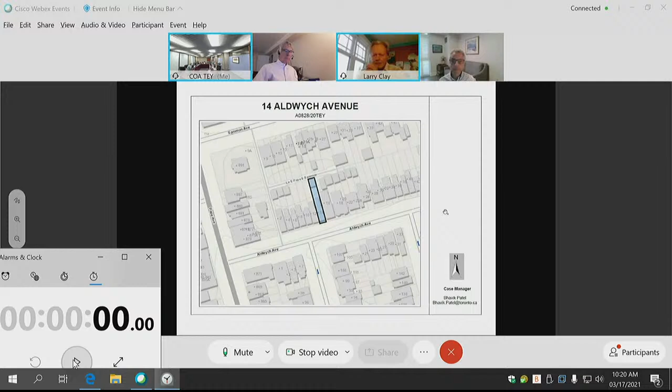Good morning, Chair and Committee. Yes, that's correct, the applicant is requesting a deferral. There was a glitch in the computer system in the zoning department, and it removed a condition which would require a variance. It was too late to circulate that information and the additional component to the zoning notice with neighbors, etc. So it's kind of a critical one - it's to do with lot coverage. Correct, yeah, yeah.

Hello, my name is Ramla Nadeem. I'm speaking on behalf of Rana Siddiqui and Asifa Nadeem, and I'm in favor of a deferral. Yes, please, I'm in favor of a deferral. I'll move a motion to defer this application.

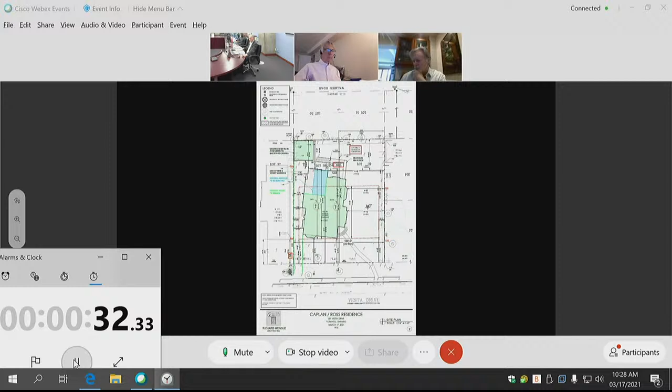And what I'd like you to do, please, is to turn to page 2. Thank you. So this is a proposal for an addition to an existing home. The home has heritage status, as it was recently designated. This was originally before the committee to redevelop this property into 2 dwellings, but then it was decided by Heritage that this house had heritage preservation status, so it's now been designated. Our proposal is very simple: there's an original addition labeled in blue at the back corner of the property, and our intent is to remove that addition and replace it with a new addition that squares off, combining the blue with the diagonal shading to the left of it. You can see we're squaring off basically the addition. We're also proposing a rear deck that's elevated because the ground actually drops off towards the back - it's a walkout lot. We have been in discussions with neighbors at number 8 Gardiner who had some concerns about the depth of the deck.

Originally it was at 20 feet, and we've agreed with him to reduce the projection from the main rear wall to 14 feet. In addition to that, there will be some privacy screening along the rear property line, as well as some drainage issues that emanate from some other lots that we're going to try to resolve with our builder.

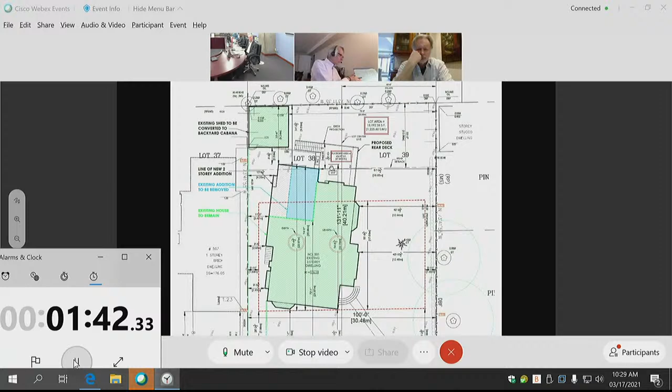If I can just take you to page number 3. Again, we are asking for an FSI of 0.72. This is an illustration of all the committee applications that have been heard in the area in the same zoning designation of 0.65 that have been approved at or above what we are suggesting or requesting. And I think we fall well within the range.

Page number 4, please. If we just look to the top two images, those are the existing home. In the middle of the page, there's actually a drive under where we do have two garage spaces. And on the right side in the middle where that circle is, that's the original addition. If we just scroll down a bit more, you can see there's also an old structure that we're going to repurpose as a cabana.

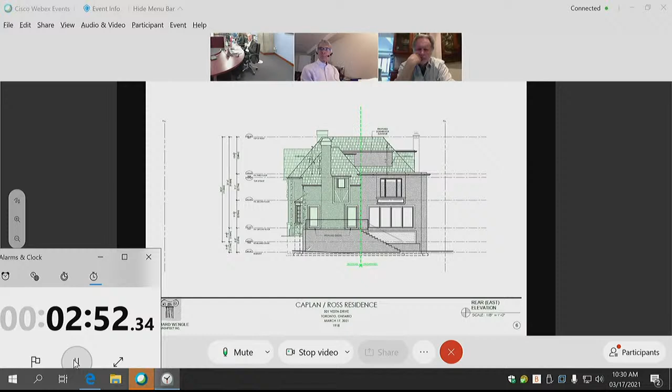So essentially we're replacing that addition that was added on, we think probably in the 70s, and just putting a new, more fulfilling addition. If we just go to the next page, the green is the existing home, and the gray shading in black and white is the proposed addition on the back corner of the house. The next page shows the other view from the rear, and the side view shows the addition and the deck.

I think it does pass the four tests. I do believe it's minor in nature, and I can answer any questions that you have. Thank you.

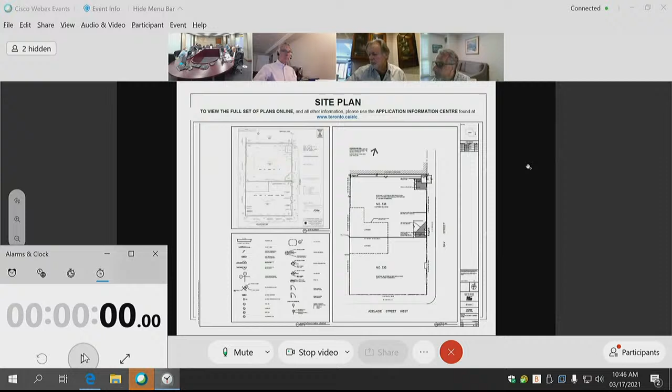I just had a question. I know that City Planning indicated there was a resolution with the applicant on a revised set of numbers, if the applicant can clarify that.

Are you able to hear me now? Okay, so the City Planning report indicated there were revisions to the numbers and that the applicant was agreeable to that. If they can just clarify that.

Absolutely. Since the application was submitted, the plans were revised to respond to City Planning's comments. In particular, the application no longer seeks to infill the entrances located at the northeast and southeast corners of the building. As a result, the amount of additional GFA being sought was reduced, and the variances that reflect that reduction in GFA are reflected in City Planning's notice.

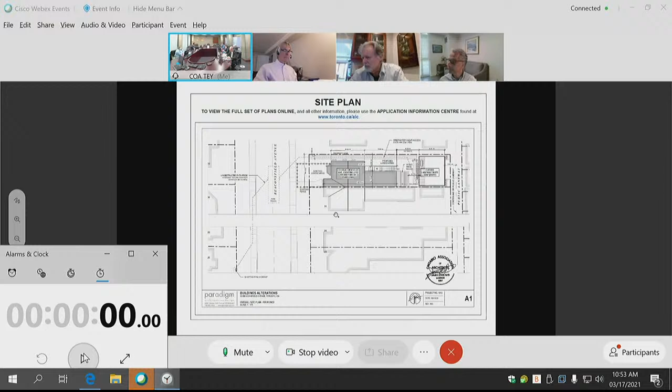Yes, good morning, Chair and members of committee. My name is Jim Sod, or James, representing the owner. I'm the agent from Paradigm Architecture and Design.

Okay, thank you. Essentially, there's just the two variances. I'm actually going to start with the parking variance. I think that's more than straightforward, given that there is boulevard parking available. It is an urban downtown site, and there is public transit readily available.

The application at hand is to request a very small increase in the floor area of a secondary suite. This is a second secondary suite, if you will, for a total of 3 suites or 3 dwelling units within the main building. Yes, there is an application that was previously applied for a laneway suite as well.

I shouldn't say as of right, I should say in keeping with the 4 tests. I think that this very minor in nature application meets all of the 4 tests as well. And it's our hopes that with the 5 letters of support that we have from neighbors at 32 Beaconsfield, 42 Beaconsfield, 40 Beaconsfield, 34 and 38 Beaconsfield, that committee would find this also a very minor application worthy of granting.

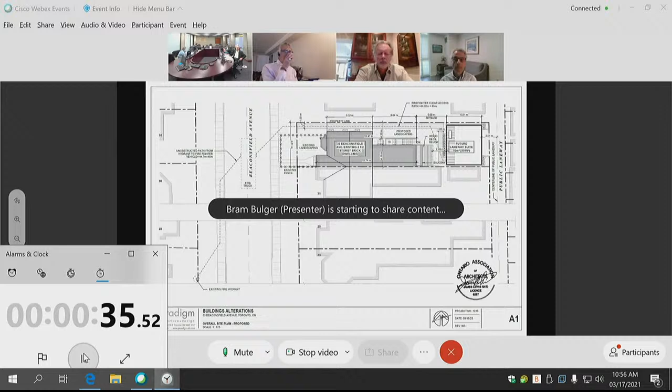I'm concerned about the commercialization of the housing in our neighborhood. This application particularly caught my attention because the work has been ongoing at that site for several years now. It's duly noted that there was a laneway suite application and proposal that was approved. You mentioned that already. That application, particularly associated with the construction at this site, granted several exemptions, far exceeding the bylaw standards for laneway suites, but that is what it is.

It's done now. This conversion of residential housing in our neighborhood is putting pressures not only on the neighborhood itself, because some of this housing is sort of set up for more transient residents and tenants. In other words, not long-term residents. That's what our feeling is here, or my feeling particularly.

This particular property has already established the fact that they've built, and I sent a copy of the rental posting last year for this requested secondary suite. It's already been on the market. Certainly the laneway suite, when it's built, will be on the market at somewhere near that type of rental unit pricing, and I don't think it's helping out the affordability of the neighborhood for established residents and tenants.

The rents keep going up in this area. Tenants keep moving out. We've got empty houses that are under construction or renovations for periods of a year plus within a stone's throw of that particular property. So this is an ongoing problem, but I want to speak particularly to the parking issue.

2 cars parked, it looks like the proposal is to park them in the laneway suite once it's built. So in the meantime, while that's being built, could be 6 months to a year at the typical rates that we've seen in the neighborhood. That's going to put pressure more on on-street parking.

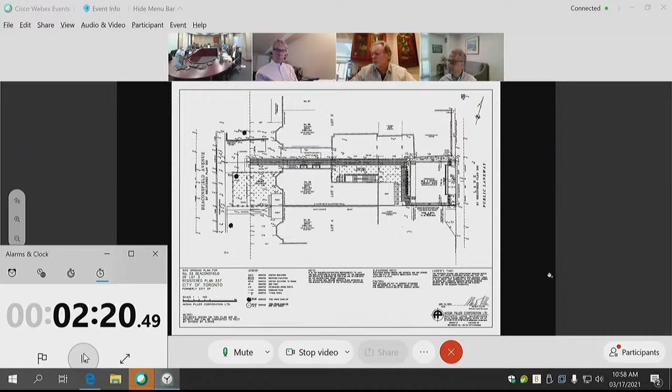On-street parking on Beaconsfield, Dovercourt, Northcote, Lisgar, the entire area is under extreme pressure because of the bars and the restaurants on Queen Street, even on Dundas coming south. There is no parking on the street, so this is just going to add to the problem.

And then once that laneway suite is built, those parking spots underneath, are they safe? Are tenants going to feel safe in having cars come and go every day, several times a day, when you're living above it? They just had that incident on Bloor Street where the carbon monoxide issue came to the forefront of being parked under a space that's operating motor vehicles, even if they're just being warmed up for a few minutes.

Anyway, I can't understand why the 3 spots can't be maintained, 3 parking spots, even if they don't use the 2 parking spots in the laneway suite. At least they use one in the front, maybe a boulevard parking requirement. But they've done away with the driveway portion of that.

If you can see from that PDF I sent you, it shows you the lot a little more clearly, because they haven't cemented it in, or haven't put in anything. It's gravel. It looks like it could be subject to proper landscaping.

Not landscape, but landscaping, waterproof, permeable driveway space with a boulevard parking space, takes some pressure off the parking on the street, which I said is extremely under pressure. It has been for years, and this just makes it worse.

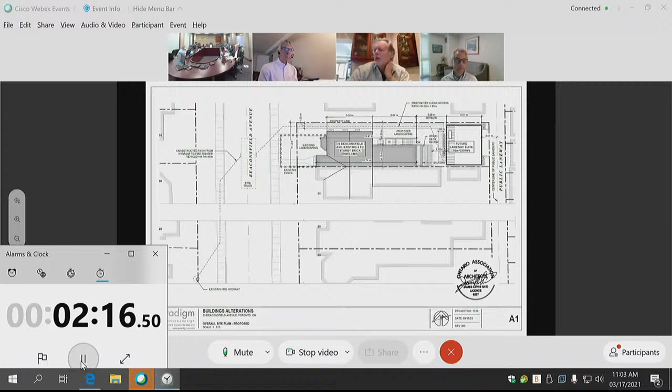I do sympathize with the neighbors and the fact that there is this intensification happening, but again, if you live in the downtown core, it is part of city life. There is no intention to have very transient residents come and go. The hope is always, and the owner is a very responsible landlord who vets his tenants quite carefully, that he finds tenants that are long-term as much as possible. So I don't see anything about the application that works against the neighborhood. I think if anything, it is completely aligned with what would be expected by the neighborhood and the residents.

I wonder, could either the applicant or the person in opposition clarify where the third parking space that was referred to currently exists? I gather there are two parking spaces under the laneway suite, and then I assumed from the presentation that somewhere on the lot there's a third parking space. Is it in the area that is on the site plan designated for proposed landscaping?

Yes, I'm sorry. Can we put that site plan up just for a moment? I'm having trouble accessing mine. Thank you.

There was obviously a right-of-way shared with the neighboring property to the north that took you to the rear. The spot was generally perceived to be at the front of the building. I don't think there was ever any kind of provisions made with the landscaping in place to have a third parking spot at the rear there. It was at the front of the house originally, so it was front yard parking.

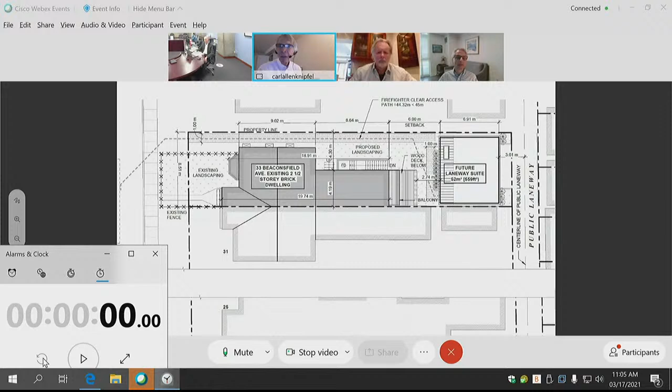I'm sorry to interrupt. I should clarify that it still exists. I'm just getting some notifications from the owner. He says that the space at the front of the house is still in existence. Okay, but it's not a legally recognized parking space. It's in the area that you've got listed as existing landscaping in the front yard. Is that correct? That is correct. Okay, thank you. You're welcome.

Chair, maybe I'll just start. First of all, I want to acknowledge the speaker's concerns that were raised. They're important, and I note there's another letter of concern in the file, mostly about construction noise and disruption to the community. These are legitimate concerns. But having said that, I take the applicant's point about location. This is virtually a downtown area, an area in high demand. The housing stock is large. It is usually suited to being made into rental accommodation. We are in a situation where the city is in dire need of rental, and I think on the whole, this is a worthwhile application. I'm not concerned about the parking, although I acknowledge it is an issue in this neighborhood and many others. But the variances being proposed, quite frankly, are relatively minor. In that context, I'm prepared to support this application.

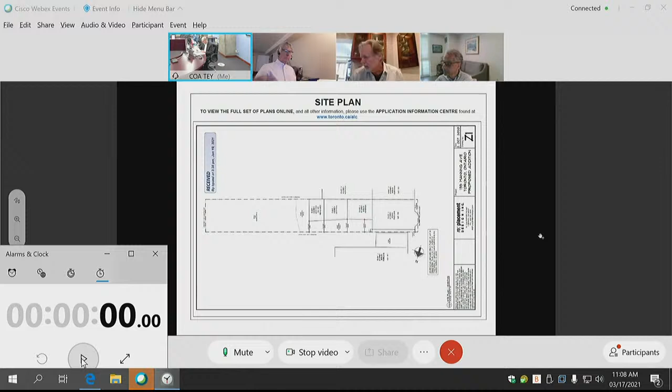Hi, yes, my name is Mike De Oliveira. I'm here representing 155 Manning Avenue, and I'm with Replacement Design, located at 911 Davenport Road.

No, just a quick question. It is a semi, is the adjoining semi 153? That's correct, yes. So the adjoining semi is supportive? Yes, they are in support, and 159 is a rental, that's why we don't necessarily have a letter from them, but 153 that's connected is in support of our application. Could you clarify, is 157 in support? Because your addition goes back quite a bit further than theirs, and I didn't see support from them, have I missed it? There actually isn't a 157 - oddly enough, it goes from 155 to 159. That's why I mentioned 159 is actually a rental property, the owners don't actually live there, so we don't have any letters from them, but they had no comments for or against. Okay, thank you very much. So that's what we've got, 157 on the drawings we have. Okay, thank you. Yep.

Sure, can I ask Bram to show a presentation? So we are proposing to build a third floor rear addition, enclosing an existing balcony on the second floor, and remodel the interior of an existing 2.5 story house. The proposed addition will create some additional space for the growing family. So we trigger some variances. I'll focus my presentation on the main ones: the setbacks, the floor space index, and lastly, the building and main wall height.

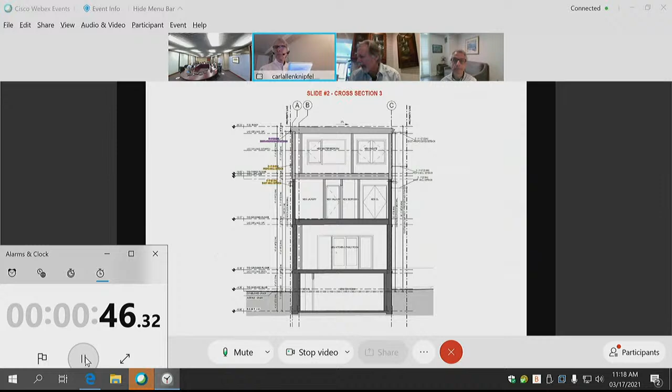So if we go to slide number 2, exactly, if you could zoom to the highlighted parts. So as you can see, the zoning bylaw allows building an addition with the same side yard setback as the existing house, so we are potentially compliant at 0.12. The proposed side yard setback is at 0.08, and it's a technical variance caused by a requirement from the Ontario Building Code for continuous insulation. That's why we trigger only 4 centimeters from what we're allowed. Associated with that, as you can see on top, we also trigger a roof eaves setback variance, item number 8. The roof only overhangs the new wall proposed by 4 centimeters as well.

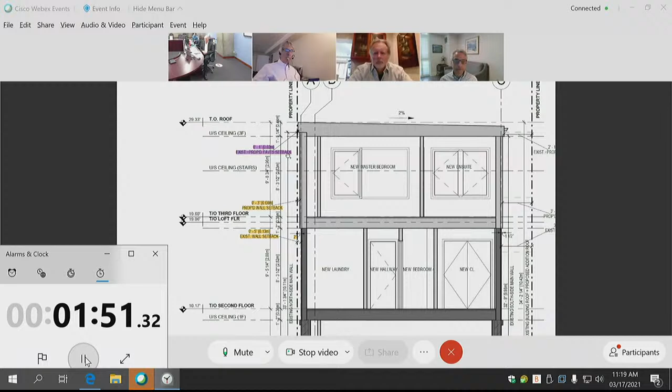So it's impossible to meet the requirement of the 30 centimeter minimum distance to the lot line. And if you also go to slide number 3, you'll see that the proposed eaves match the existing eaves.

So now if we go to the FSI, item number 3 and slide 7, please. I want to highlight first that there's a distinction at the two rows at the bottom. It's highly misleading because we have to include the existing basement in the calculation of the FSI.

Because the actual definition of a basement has changed in 2018 and requires us to do so. To clarify, the basement is well below grade and the ground floor is typical of other neighbors' houses. If we were to only count the above grade floor area, as it should have been the case, the proposed FSI is only 1.08.

For that reason, it already impacts the reasoning of the massing. Second, related to the same thing with the FSI, as you can see, the footprint of the addition between the existing and the proposed on the third floor area is quite small, 768 square feet, so that equates to 26% of the FSI. The existing house is also already over at 0.78.

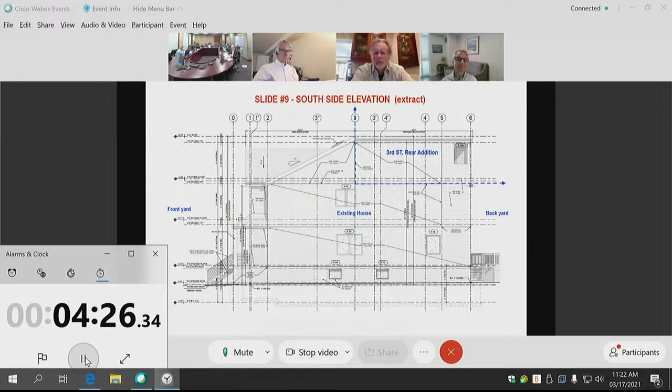We do not hear what you're saying. Can't hear you, Chair.

I wonder, Chair, excuse me, if I could just ask the applicant a quick question before we get started. I know we've got a lot of people scheduled to speak and we're interested in hearing those concerns. Given that, I just wanted to ask the applicant whether, obviously the application was circulated, but did you have any discussions or conversations with any of the neighbors in the surrounding area at all?

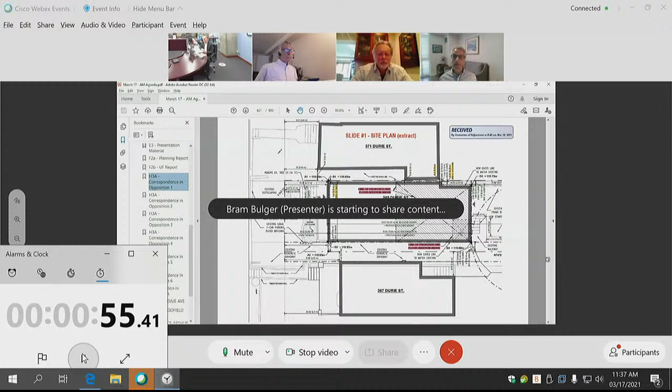It is, of course, let's not pretend that 25-foot lots are islands of privacy. And if that is what you're seeking from a home, then Durie Street is probably not the street for you. But what is incredibly valuable in this street is the sense of community that living close to your neighbors has. But with that comes this idea that we try and build those little nooks of privacy that we care about, and that we respect them in our neighbors. And that's kind of the unspoken deal of this street.

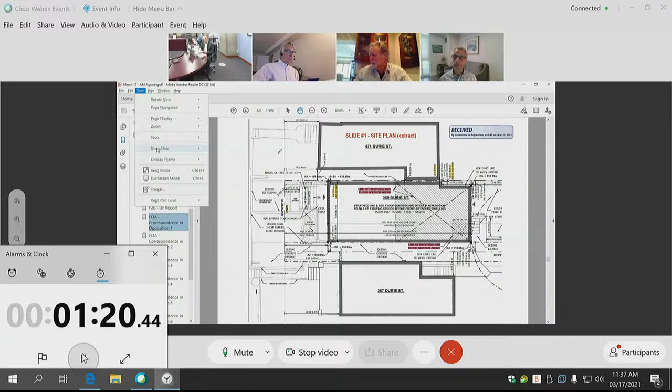We're lucky to have yards in backyards where we can enjoy the sunshine, where we can have, even in the city, a little spot of private enjoyment, where we can eat a meal and nobody's peering over us, and have the sunshine on us, or maybe just lie on the deck. Why not? Why shouldn't we have that from the house that we own?

Neighborhoods, according to our official plan, are physically stable areas. And our official plan says the stability of our neighborhood's physical characteristics is one of the keys to Toronto's success. This is a successful neighborhood. And the official plan points out that while communities experience constant social and demographic change, which is very true of Durie Street, the general physical characteristic of Toronto's residential neighborhoods endure.

My wife and I raised our 3 daughters here, and the proposed development of 369 Durie doesn't affect our yard, it doesn't affect our sunshine or our privacy. But from living here, I know how valuable these things are. So when I became aware of the proposal for 369, I wasn't concerned for us. But of course, I did think about what if. What if neighbors moved beside us and proposed the same? A 30-foot wall that blocked our little patch of sunshine with a balcony that peered over my summer dining room table.

And if I didn't want that for me, then how could I want that for someone else? So here I am. The official plan says physical changes to our neighborhoods must be sensitive, gradual, and fit an existing physical character. A key objective of the plan is that new development respect and reinforce the general physical patterns of the neighborhood. And that's where I think that this proposal just goes too far. The proposal is simply too massive for the lot.

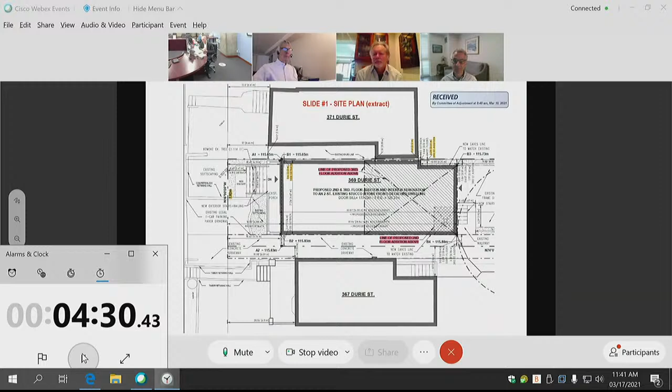I don't think that was what was intended as a minor variation. We have already seen the city planning department condemn this proposal as simply too massive at nearly twice the permitted size. It's not a minor variance. It's not consistent with a sensitive and gradual change to neighborhoods envisioned by the official plan, and that it's your job to respect. So with the city and with our neighbors, I think this committee must conclude that this variance just cannot be granted. Thank you.

Yes, thank you. This is Justin Hollins at 394 Durie Street. I've been living in this neighborhood since 1999, and I love this neighborhood. It's a great place to live.

The houses are very similar to each other, and as previously mentioned, they're very close to each other as well. So when one house expands, other houses commonly suffer. In this particular case, the size of the additions, the variances, do not correspond to the character of the neighborhood. As we heard from the neighbors at 371, this new construction will block the light in their backyard and others. And of course, there are, I think, privacy concerns when you build so high up. And for these reasons, I believe the proposal should be declined. Thank you.

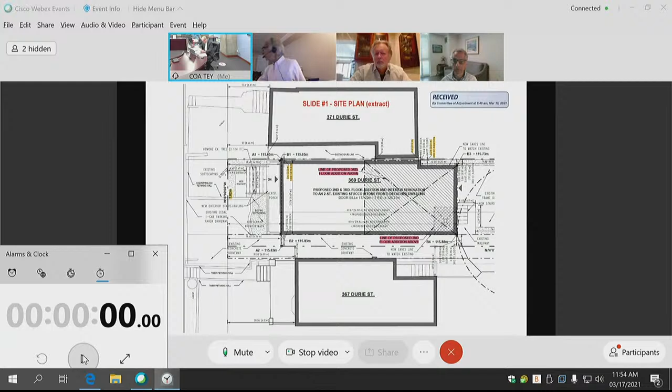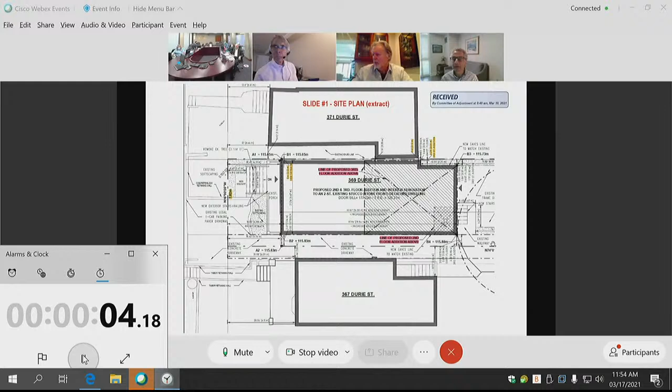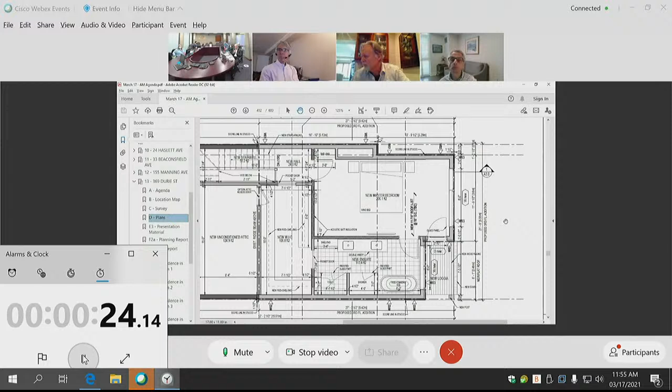The original intent from the homeowners was no balcony or loggia at all, but because there's a regulation to create an area of refuge from the Ontario Building Code, we have to provide that space. We tried to minimize it. We also placed it toward the south, and it's indented in the structure.

So as you can see, the possibility to see over the neighbor is limited. The same way, there's no window created on either side. You see, we are only facing toward the back. We would also be flexible in terms of the loggia toward the south, to actually place a privacy screen on that side if it helps in terms of privacy.

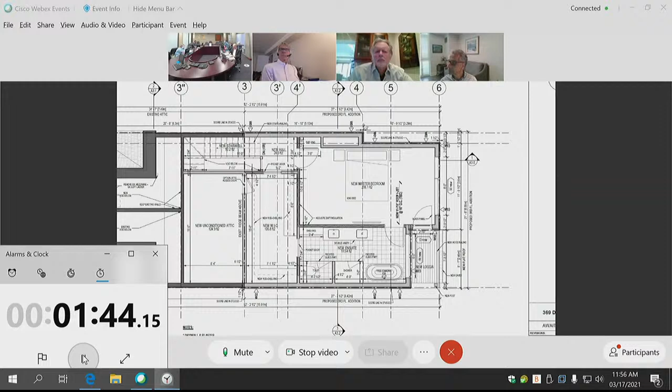Then in terms of massing, that's also included with the assistant planner report. Our notice is actually irrelevant in terms of the variance number for the main wall height. We actually can benefit from a grandfather clause.

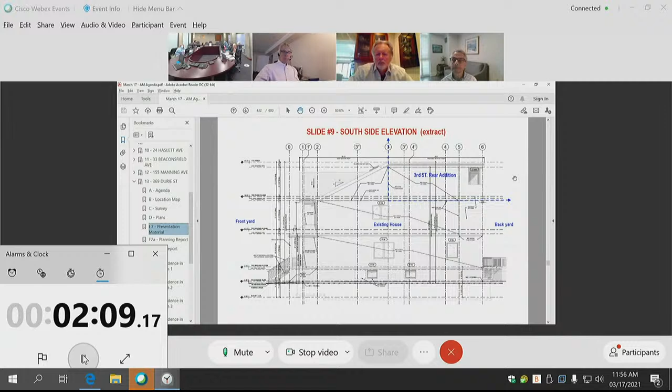If you go back to slide number 9 on the other PDF, the south side elevation, if you zoom in toward the middle and the existing roof, you can see that the main wall height is already higher than the proposed one. So we actually benefit from a grandfather clause. The argument from the neighbors, as well as the assistant planner, should be disregarded in terms of the side exterior main wall height.

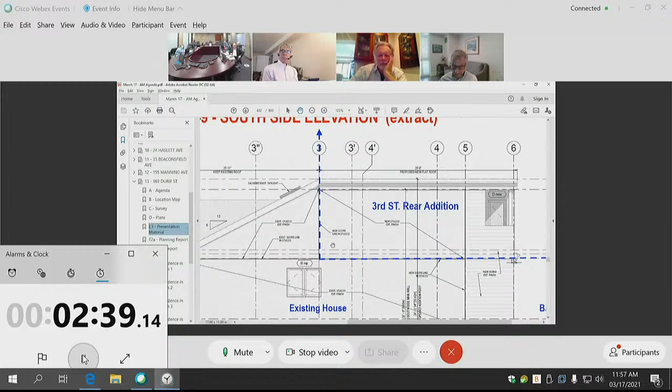Then for the density, the 1.51 — as I already explained, in terms of having to include the basement, some previous decisions from the TLAB also made a distinction between having included the basement or not. That's something that should be considered in terms of setting precedents for 1.51, that it should include the mention including the basement.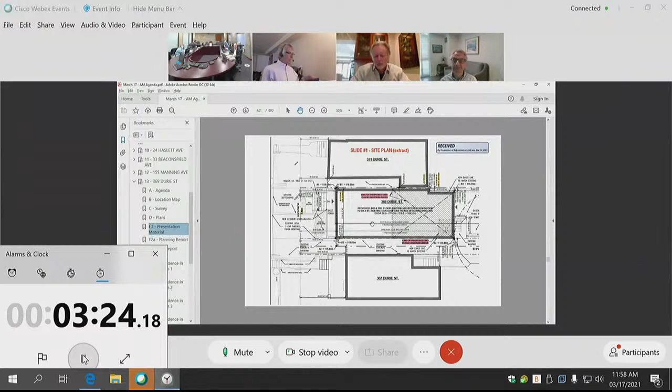For the third point, the assistant planner mentioned that no decisions were found within this neighborhood. If you go to the map, slide number 8 please, you can see that the area considered was only the blue one, which you call the immediate context. But if you go a little bit to the north or toward the south, there are two decisions approved by the committee for 289 Durie Street and 293 Durie Street, where the roof was at 0 and the height of the main wall on the side or at the back was either 10 or 9.63 meters. So that's for the privacy and massing.

In terms of softscaping, we can go up to slide number 4. As you can see, most of the existing remains. We only slightly changed the stairs, that's why we lose 2.5 over the 50 or 75% required. So it's really minimal.

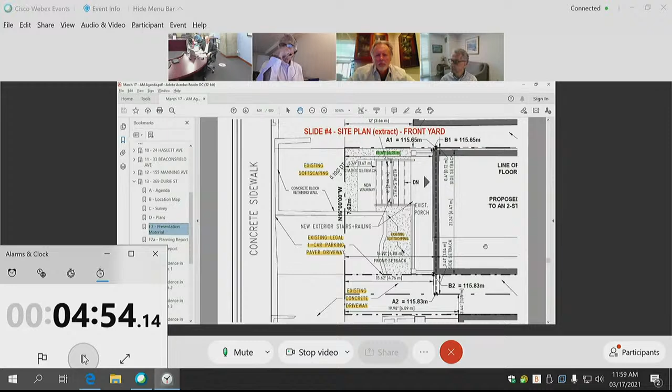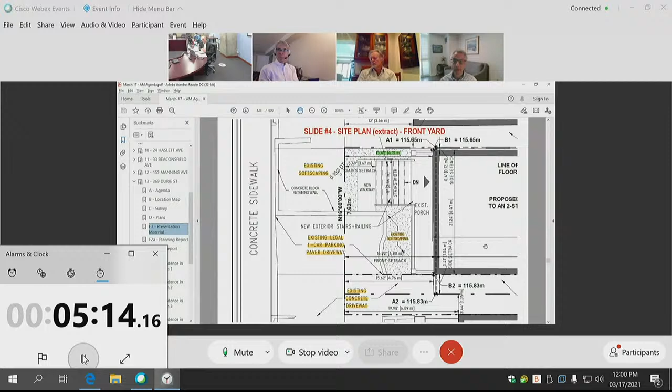And I'd like to point out that other things should be disregarded, in terms of the history, what happened in 2002 — the homeowners were not responsible for that fact. There's also mention of not respecting the character of the neighborhood. We actually proposed for the front porch to replace the stucco with some brick veneer and siding that will be more coherent with the rest of the houses. And I guess there were so many points.

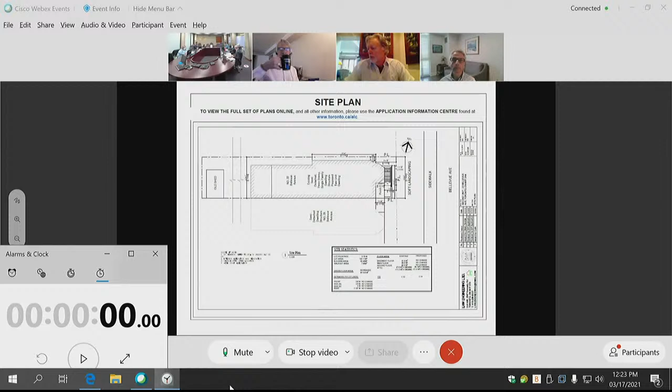Good morning. My name is Vijay, and I'm the agent for 22 Bellevue Avenue.

Yeah, I just wanted a clarification under the purpose of the application. I believe it should be not a detached dwelling, but a semi-detached dwelling. Yes.

Yeah, hello, it's Yan Bing. I agree with it. I think it will provide more housing for the community and the city, so it's good for a healthy housing market. Thank you.

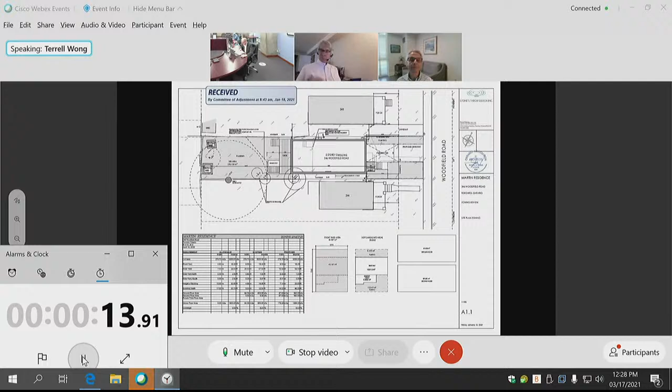Okay, the design that you have before you is not really changing on the outside of the building except for the addition of 3 fire enclosure windows on the north facade. The reason for the variance on that wall is because the existing wall is 18 inches or 45 centimeters away from the property line or less.

And 2 of the windows will be fire glass. And then the one at the top right, that will be an operable window, but it will have a fire shutter as per code. And that creates another variance as it sticks out into the setbacks on that property line. And then I believe the third is a parking variance, which is created by the fact that the owner wishes to have 2 rental apartments in the basement, which are shown on the basement plan.

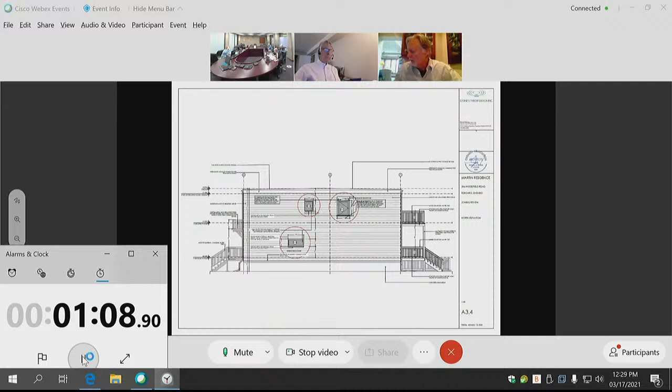The existing side door on the south side is the entrance to those units. We have talked to the neighbors. The owners of the building have talked to the neighbors subsequent to the letter as well. One of the concerns in the letter was that they were afraid that the windows on that side would have a lower fire rating than the rest of the wall.

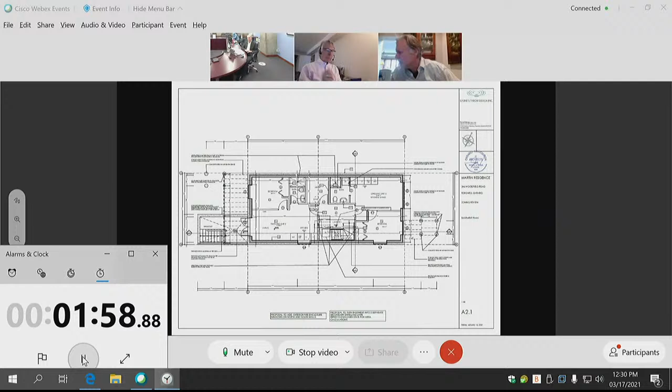But we assured the neighbor that because of the way the building code is written, a 1-hour fire rating will be required for the 2 fire enclosure windows that don't have a shutter, which is greater by 15 minutes than the requirement for the wall, as well as the shutter is part of the insurance of the home and will be inspected as per the insurance yearly. And it also meets the 45-minute rating, of course, of the wall on that.

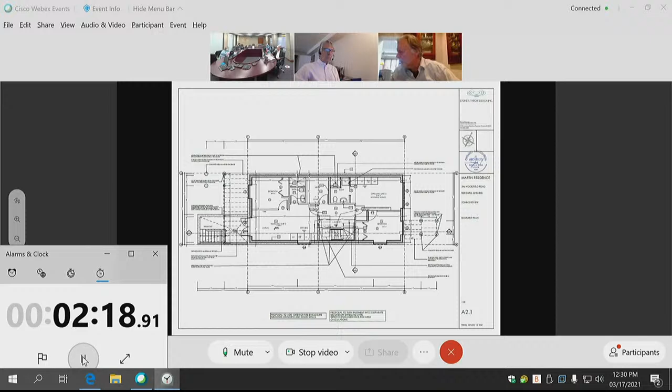Also, the building on the north side is separated from the building to the north by an existing driveway, so the distance between it and the next building is substantially larger. And those are really the only changes. If you wanted to know in regards to the last committee of adjustment, this building is, I think, a little bit smaller than the original committee of adjustment. And everything physical on the building except for those 3 windows will not change based on this application.

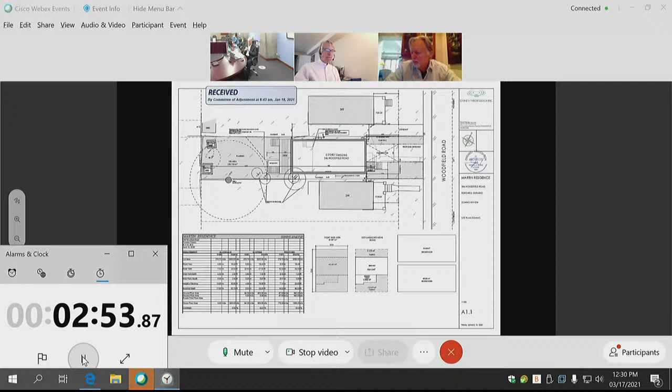Yep. So from what I understand, in 2016, this site received committee of adjustment variance approvals. And so I'm assuming the house has been built. And so what's happening with the side yard setback?

Was it missed in the last committee application in 2016, or what actually has changed? A wall is allowed to be 18 inches, or 45 centimeters, from the property line without any enclosure windows. As soon as you put a window or fire enclosure on that wall, it's no longer allowed in that location as of right.

In 2016, before I was the architect on the project, my understanding is they hadn't needed it. The building was slightly different then, and actually a bit smaller than it is now. They didn't have any openings on that side at that time. I think it was more of a misunderstanding of what was required for Committee of Adjustment. It's confusing when it's the wall going for the variance with no mention of windows. We've had many back and forth with Jakob at the City of Toronto Committee of Adjustment trying to understand where this zoning variance comes from.

Could you go to the second floor plan? Is this an existing condition? Is the deck already there? Yes, these drawings, except for the windows, have a permit. So the deck has not been built yet, but it's already been permitted.

My concern is that the deck projects beyond both neighbors, so it would seem appropriate to have screening on the north and south sides. I was trying to clarify whether the deck had existed for some time without creating problems, which would ease my concern. But since it's a projected deck, I could see privacy issues along the north and south sides, and I was wondering if you'd be open to an opaque screen on both sides.

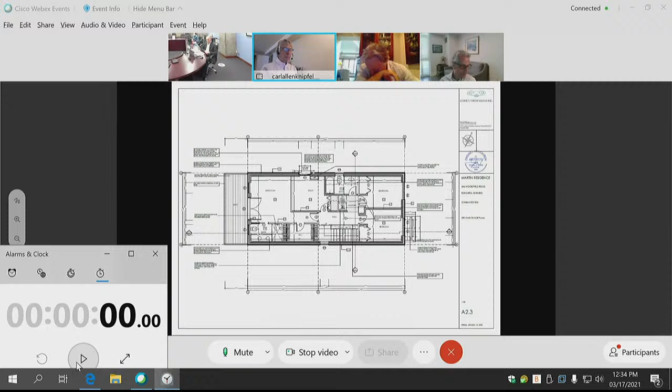That is certainly a possibility for sure. Yep, I wouldn't be against that. Okay, thank you.

Hello, it's Nikki here. Hi, how are you? I think everything's been addressed as has been discussed.

Our main concerns were the three north side windows, mostly from a fire safety perspective. As mentioned, the original 2016 design did not have windows on that side, and the original structure had just a few basement light windows, and one for the kitchen. We were making sure about safety mostly, and secondarily, the windows look into our existing south-facing wall windows, so there was a little privacy concern. One of the windows is a frosted bathroom window, and the owners let us know that's okay. But those were our main concerns: fire safety, which they've addressed, and secondarily privacy.

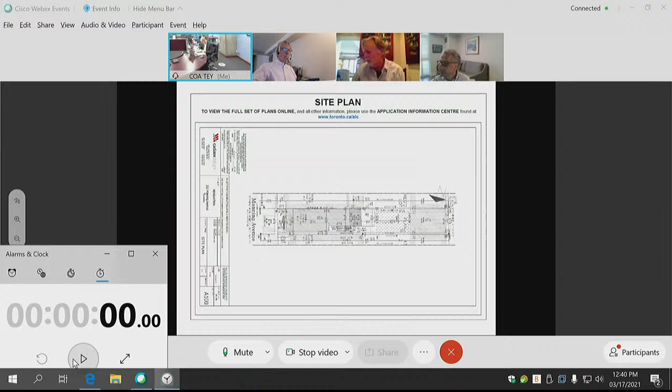Hi, yes, I'm here. Yes, that's right. Joe Dome, 1101 Steeles Avenue West, agent for the owner.

Yeah, I believe this is a very minor addition. It's fairly small, so I would move approval of the variance with no conditions.

Good afternoon, I'm here. My name is Amar Roba from YEJ Studio, on behalf of the owner.

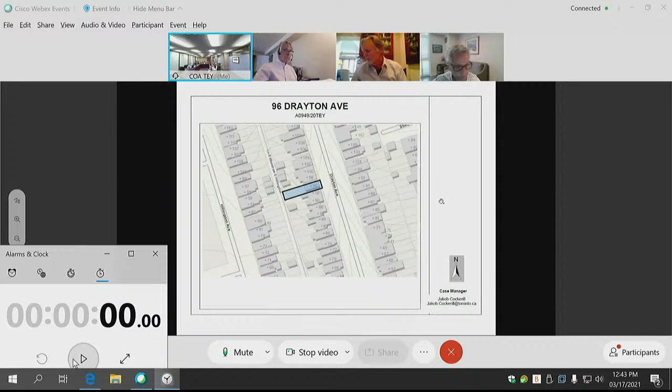Yes, I am. Hello? Oh, hi. Yes, I'm Enzo Lacasano from Arch DWG. I am the agent for the owner.

Yes, we actually submitted a cover letter as well, noting the tweaks that planning requested from us. So the floor space index was reduced because the overhang on the second floor addition, they wanted us to push it back 1 foot, which reduced the GFA. The roof eave stays the same. The total coverage of the garage was reduced by 1 foot.

So my question is, if there's a way to put up the site plan to show the rear yard area? My question is, is there a way to increase the amount of soft landscaping in the rear yard? For example, I think there was stonework, a stone patio, so is there a way to change that patio stone to something more permeable, so that would assist in permeability in the rear yard?

Good afternoon, Mr. Chairman. This is Yasso Somalingam, the applicant, on behalf of the owner. What has happened is that when we applied for the permit revision for the alterations inside, the whole backyard was asphalt. So my client changed that asphalt into a grass area next to the garage, the existing garage area. The paving which is there is kind of permeable paving, except the driveway, which is an existing old asphalt driveway that has existed for a long time. This is basically an existing condition.

Only the deck was redone, and that's where they get into the issue. But the deck was built on top of the existing asphalt area, which they converted into kind of a permeable paving. And the rear side next to the garage, the homeowner converted into a grass area. So it's improved compared to the previous conditions for sure. And still it's not meeting the minimum requirement for soft landscaping, because most of the area is covered by the garage in the backyard.

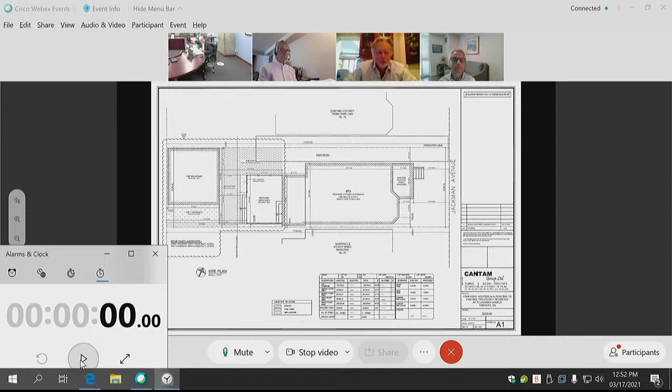It was built by the previous owner. The current owner got this home only in October last year. This deck was an existing condition. We are trying to close the file, and that's where we got hit — the minimum landscape requirement for the backyard, the required soft landscape, is not meeting the condition.

Thank you. Sorry. Yes,

I'm the authorized agent and applicant on this application, Yasso Somalingam.

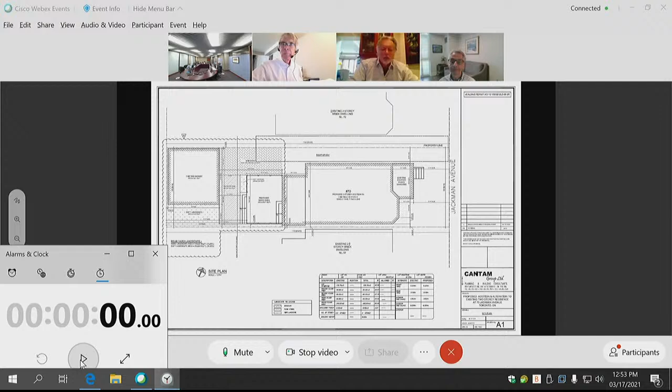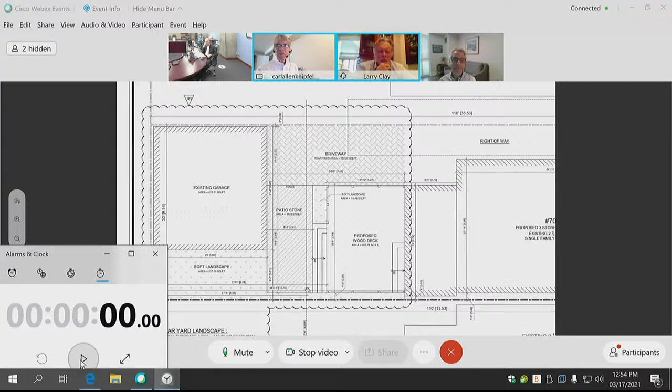I have one, Mr. Chairman. I think Mr. Solomon's suggestion was a very good one, if I'm putting these words in your mouth correctly — there's a patio, a driveway, a deck, a lot of paving stone, and a little bit of grass. The permeable paver, soft landscape provision in the bylaw is to allow for percolation of water into the soil. His question to you was, is there not any way the patio stones could be changed to soft landscaping? I don't see a problem with that, but I'm wondering what that would do — it would reduce your variance substantially. What would the new variance be if the patio stones were replaced with soft landscaping?

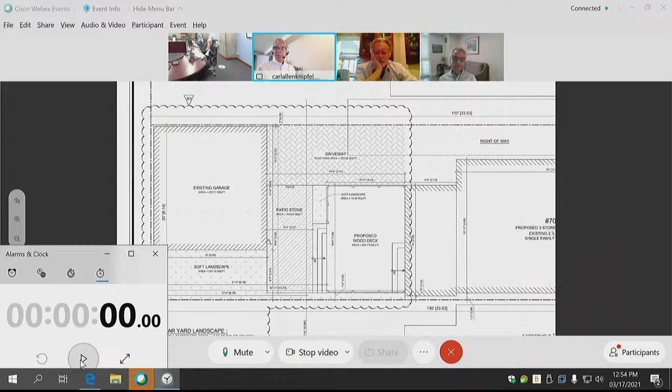The backside area, which is 8 feet by 18 feet — hold on, let me quickly do the calculation. It's coming to about 140 square feet, 145 square feet area.

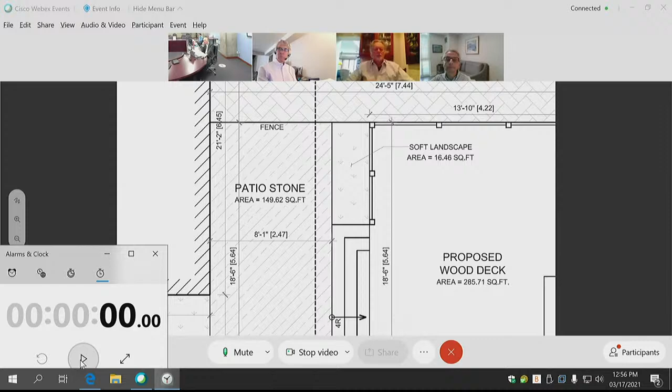The new homeowner bought it in October, but this has existed for a very long time. The only thing we'd have to do is take out all the hard landscaping, the stones, and replace it with permeable stones. That will reduce the variance, but I don't know how we can word it to get this approved. I don't know whether planning would be okay with approving the variance on the condition that the 18 feet 6 inches by 8 feet patio stone area be replaced with permeable paving stone.

Chair, I don't know what's there right now. I've heard the agent refer to that as permeable a couple of times. Can I ask, is it permeable pavers there now, or are you proposing to put permeable pavers in that portion? It is not permeable paving. The driveway is an existing driveway in front of the garage. Behind the deck is not permeable paving — it's regular paving.

So if you were to request that area either be replaced with soft landscaping or lifted and have permeables put in, would that be something you'd be prepared to do? If that's the only way to get this approved, yes, we'd have to do it. But my question is how the wording can be approved. Well, if it's permeable pavers, they don't constitute soft landscaping — it's been a bit of a fix in certain situations. So we could put a condition that those pavers be replaced with permeable, and we wouldn't have to change the variance. Okay, let's do it that way. That means except for the driveway, which is asphalt — we can't do that one — but anything behind, the area about 18 feet 6 by 8 feet behind the deck, is to be changed to permeable paving.